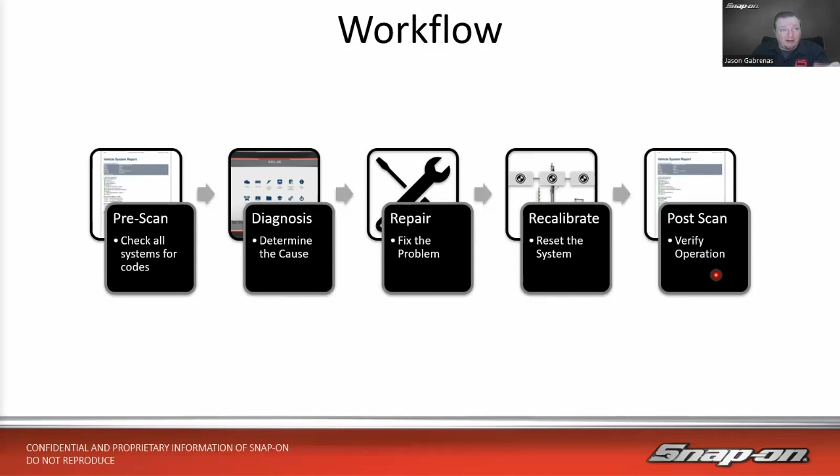So we'll scan all the modules again, and we'll make sure there aren't any codes left in the system, and that will allow us to give that car back to the customer with a clean bill of health and hopefully avoid any of those comebacks.

So for this section, as we said, this is part 1 of 2. This segment tonight is going to talk mainly about the diagnosis phase. If the codes are found, we're going to determine an action plan. It's good to have a repeatable diagnostic workflow. We're going to walk through and gather information. I like to say wrenches don't really fix cars anymore - it's information that fixes cars, because we need that information in order to go through a good diagnosis and repair the problem.

So we're going to gather TSBs. TSBs are the first thing you should check, even if you don't think you need to, because the manufacturer may have figured something out that you're about to find out on this car. So, oh yeah, we've seen like 100 of those, and here's the problem, here's what fixed it. So you may find yourself with a common problem, and a TSB can help you out with that.

Then, of course, OEM repair information. I need to have my diagnostic charts and my wiring diagrams and any other manufacturer specific information from the manufacturer to repair a car, more than likely.

How about some real world repair information? We want to put that in there as well. What have other techs done in this same situation? Maybe you'll be able to figure it out a little bit easier if you can see what another tech has done. And then data stream, right?

We want to check the data out of the vehicle. We want to check freeze frame data as well, and check the data stream coming out, see if there's any anomalous data. Functional tests - we can use functional tests to diagnose something I need to turn on and off, like an AC clutch or some sort of a solenoid. Maybe I need to cycle it on and off with a bidirectional control. Functional tests can help us in that diagnostic process and say, hey, this is either working or it's not.

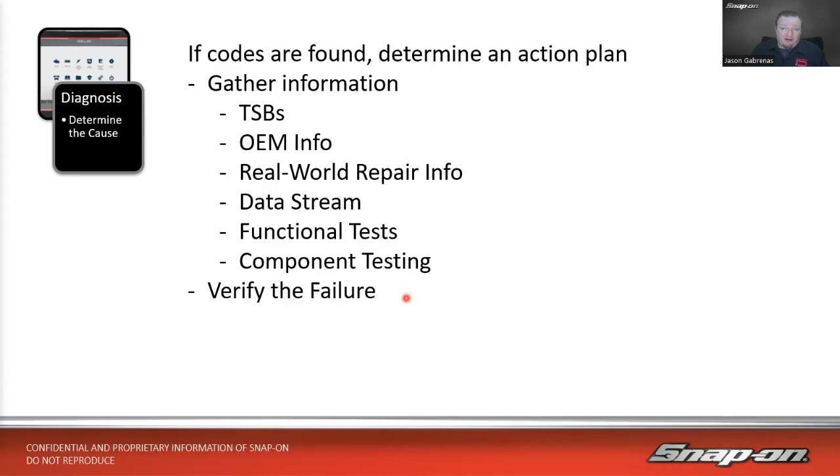So let's go live on the tool. This is going to be mainly tool driven today. But before I even get on the tool, I need to start with the customer, right? Customer comes in, I have my shop management system right here. I need to write a repair order. There's a few things we're going to do with this repair order throughout this scenario.

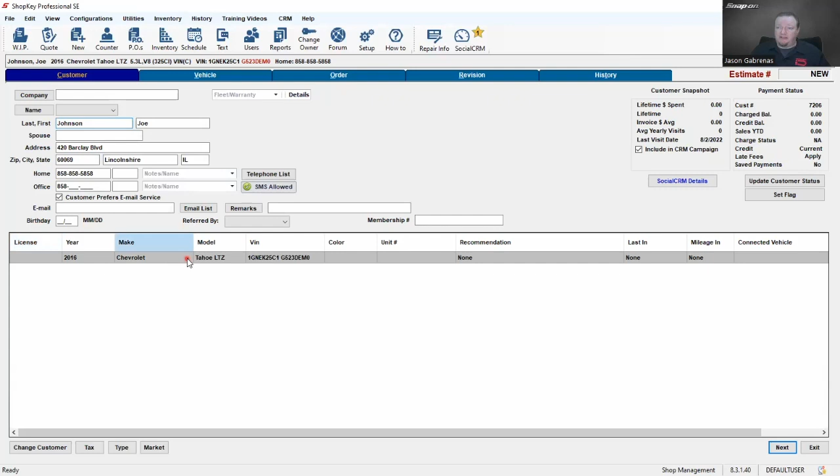So I've got to start a new order here, and I'm going to write it for Mr. Joe Johnson from Snap-on's founder there. And he has a 2016 Chevy Tahoe. So we're going to open that up, and then we're going to get to the repair order.

So vehicles come in and we ask Mr. Johnson, well, what's going on with your vehicle? Maybe he has a fluid leak or no start, hard start. How about a surge or a chuggle going out there? Maybe it's a drivability type problem. So maybe we'll add that one in there, drivability problem. Once we go through, we say, okay, it's going to be, however much it's going to be for a diagnostic fee. And then we'll just go through like that and start the order.

So we bring the vehicle in. And then, of course, what we need to do is we need to scan that vehicle. So we'll take our scan tool here and we'll go into scanner. Now, this is an important screen that comes up, and I want to make sure I mention this, spend a little bit of time on it, because we still do get phone calls throughout the day at tech support for this type of thing.

So this is important to note, because it is the opposite of everything we've been telling you for the last 30 years of scan tools. What we need to do, and it's been 4 or 5 years it's been this way, we need to make sure the key is on the vehicle before we connect the scan tool. Now, why do we need to do that? So we have this function that's called instant ID.

So what that does, and this applies to any of our scan tools, it just seems to affect the ones with the wireless dongles a little bit more, but it's true with any of our scan tools now, is when the tool sees power, that is the cue for the tool to go look and find a VIN in the module. When it finds the VIN, it pulls it back, decodes it, and that's how we can get the vehicle ID more accurate.

Problem is, if the key is off and I go to plug into the vehicle, well, the tool's still going to see power, right? It's going to see power coming down pin 16 as long as the fuse is good. So it'll see power, and then it'll try and find the module. Problem is, key's off, so the module's not on. So it's going to try and find it. Eventually it times out, tries again. During this time, maybe you've turned on the key now, so it throws it out of sequence. So it seems like it's taking a long time to ID a vehicle in some cases.

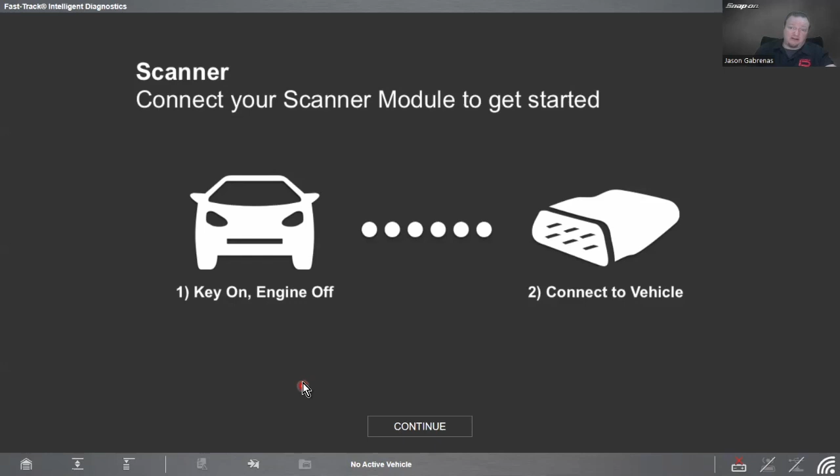It shows up on the Zeus and it shows up on the Verus. It doesn't show up on the other tools because it doesn't really affect them as much, but that is how it works. So we want to make sure the key is on first before we plug in. Once we've done that, we can ID the vehicle, or maybe instant ID is already started, but in this case, we're going to load our demonstration vehicle, and it is our Tahoe right here.

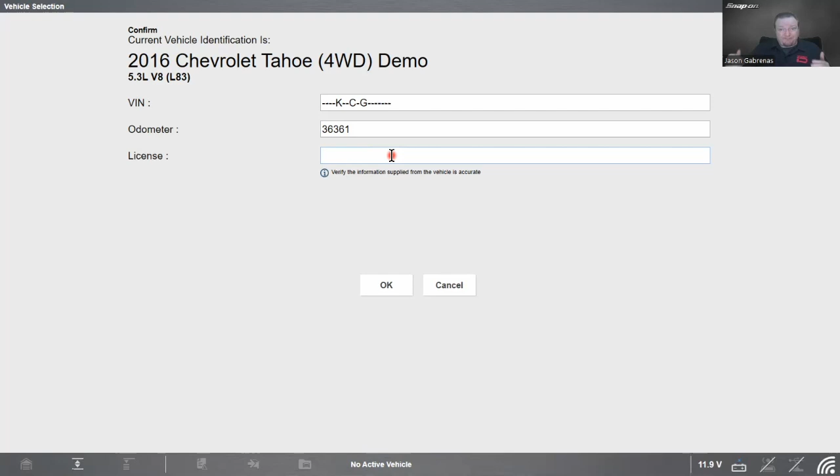And then we also add in the odometer on vehicles that support it. So it'll pull the odometer out of one of the modules and just pull that up on the screen, as long as the computer supports it. And then it also has another place to plug in the customer's license plate number to make it easier to find later on down the road. If I have 1,000 vehicle records in there, it saves time. So we'll hit OK.

Load into the vehicle. It's currently running in demo mode, so let's continue there. All right, and then we have our code scan, clear all codes, and then service resets and relearns quick link here. So this gives us a quick link to any resets, relearns, recalibration that's needed on the vehicle. So that gives us a nice link there. We're not going to talk about that today though.

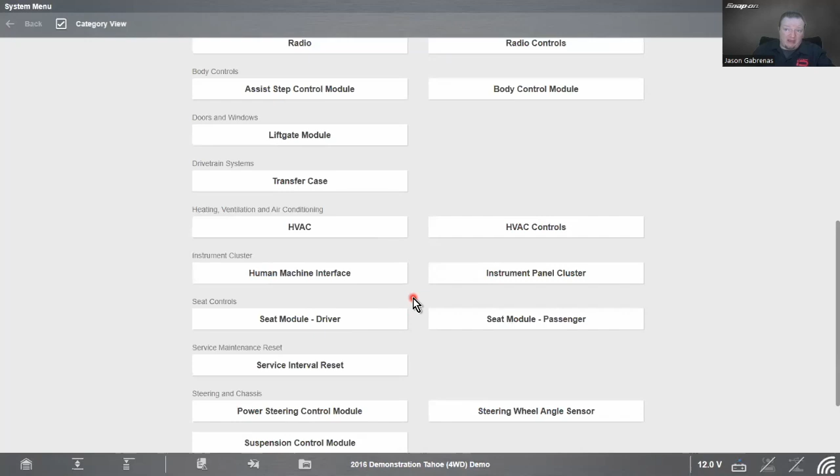And then down below is going to be all of our modules. So if I don't have a tool like this, I can still go into my modules separately. What we do though is we categorize those modules: steering and chassis here, seat controls, instrument cluster, etc. So it gives us all of these categorized systems. If I have 20, 30 systems on a vehicle, it makes it a little bit easier to see.

And then we have our code scan. So we talked about the importance of doing a code scan on a vehicle so we can scan the entire vehicle, all modules, and check them for codes. So we'll do a pre-scan since we're just starting. So we'll have our pre-scan here.

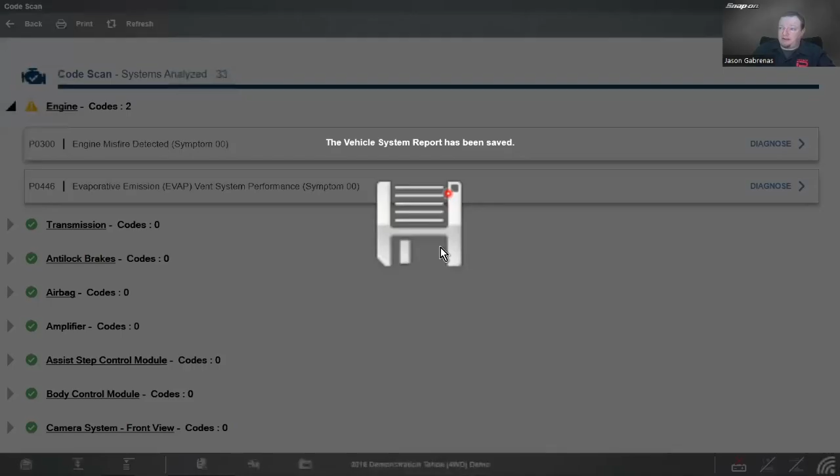It's going to go through, scan all the different modules, and then it comes up with some codes. You'll also see that it's saved there. That little flash of gray on the screen indicates that it's been saved. So it's been saved to the tool, and it also will upload to the free Snap-on Cloud service that you would have access to as well, as long as you're using a Snap-on tool.

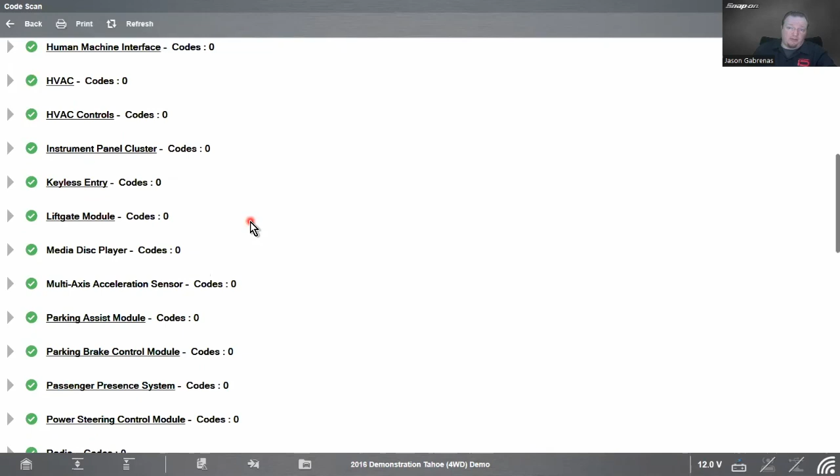And then we can scroll down and see the status of all the other modules on the vehicle. In this case, they're all green, which means there's no codes and it's in good shape. OBD2 codes, it also checks, and it also checks mode 10 permanent codes, and it also checks the readiness monitors down below for all the monitors, right?

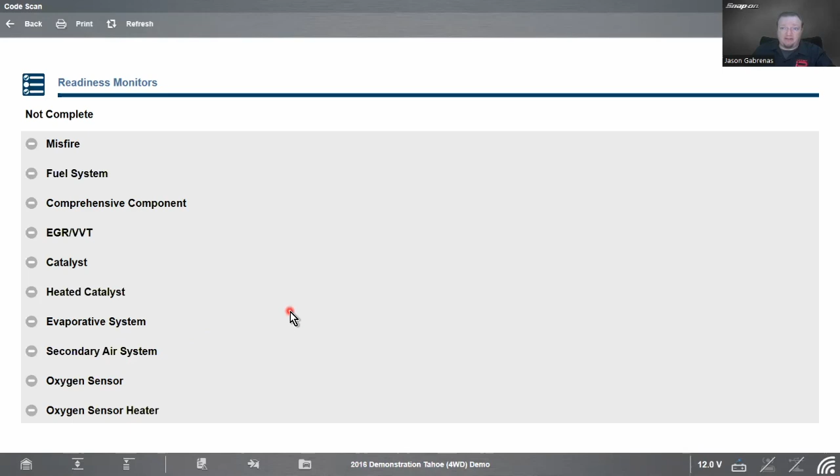So this will help you when you do a post scan as well, and you can see, well, have all the monitors set? I can confirm that the monitors have set, or hey, you can see, was a code cleared recently, maybe by another shop? You can see not all the monitors may be run, and it may also have a code in the permanent codes as well.

So once all that's done, we have our codes on the screen. Now we want to report. We have a report that we can share with our customers. So you saw how it's saved. So you can come down here, open this up. We can see the codes are here on the left. And then I also have a vehicle system report over here. So if I double click on that, it's going to open the report for me in a PDF format.

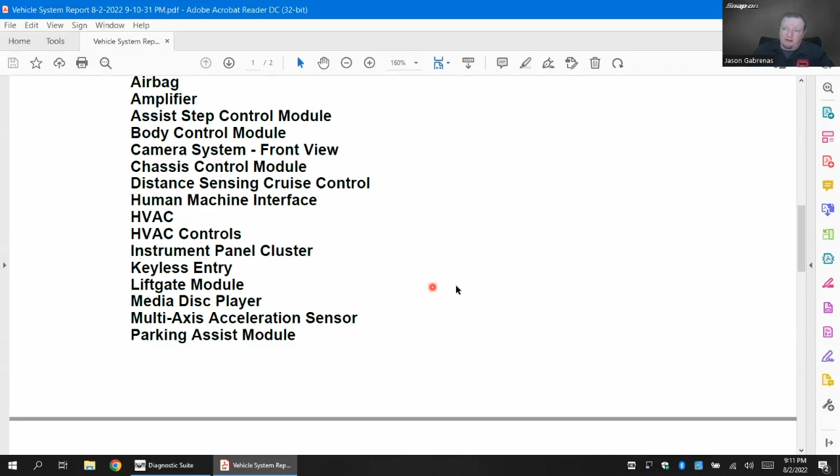And you can see right there, shop name and all that, vehicle information. That's going to show us the systems with codes, systems without codes, and then it gives us a little more detail down the bottom here. It shows us our monitors as well. So you can see all the detail there.

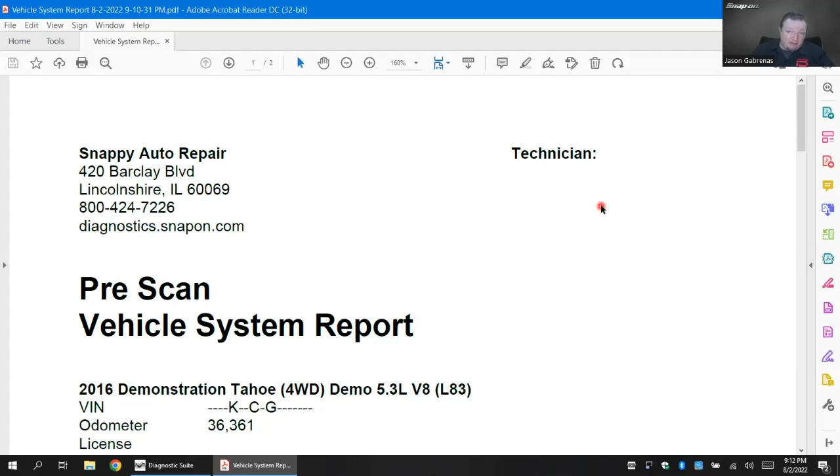So we could print this out. We could hand it to a customer if we wish to do so, or we can attach it to an email if we wanted to do it that way, or we can share it using the free Snap-on Cloud service as well. So let me show you that.

On a Windows-based tool, like a Zeus or a Verus, we have a link to the Snap-on Cloud. Otherwise, you can go right to the web. Anything with a web browser, it'll work. Just go to the website altusdrive.com and you can set up a free account there. But if we go in here, we can see how it looks. And it's back to where I was.

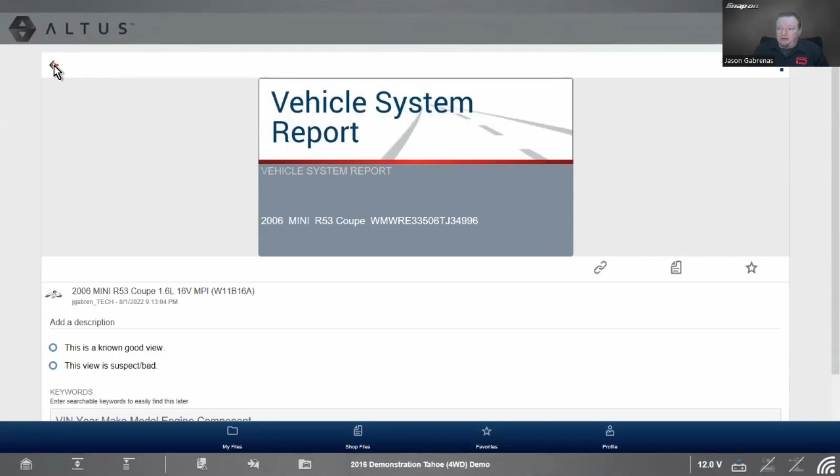So you would log in, and then we'll be able to see, here's my system report from earlier this evening. We can see that vehicle system report right there. We can click on it, open. I can click on it, open again, and it's going to open in a new window. And it gives us a report. It looks exactly like it did on the tool already, right? This is one from earlier. We can see that right there.

If we go down to the bottom of this report, we can see it also tags it with what kind of report it was, pre or post scan, code numbers, VIN, year, make, model, etc. We can see all that information down here on the bottom. And that makes it a searchable tag, so we can go through and pull back just that information.

If I have thousands of different documents, because it does pre-scans, post-scans, ADAS reports, it does screenshots, it does photos off the camera. So all those things get uploaded to this website. So you would want to be able to search through and see the documents related to just that one vehicle. If you did the license plate, it would tag it in there as well.

Now, if I wanted to share this with a customer, I can go up here to this link, and then it's going to give me 3 ways that I can share this. So first one, send via SMS. So that is if I was on a phone and I wanted to text it to somebody. If I had this open on a phone, that wouldn't be grayed out.

It would give me the option. So I can click on that and I could text it to somebody using my phone. SMS is short message service, or a text. Next one, send via email. So if I have an email client installed on the machine I'm using, like Outlook or something like that, I can click on that and it'll open up a new email. It'll put the link in the body of the email, and then I can just tell it who I want it to send it to, and it will send.

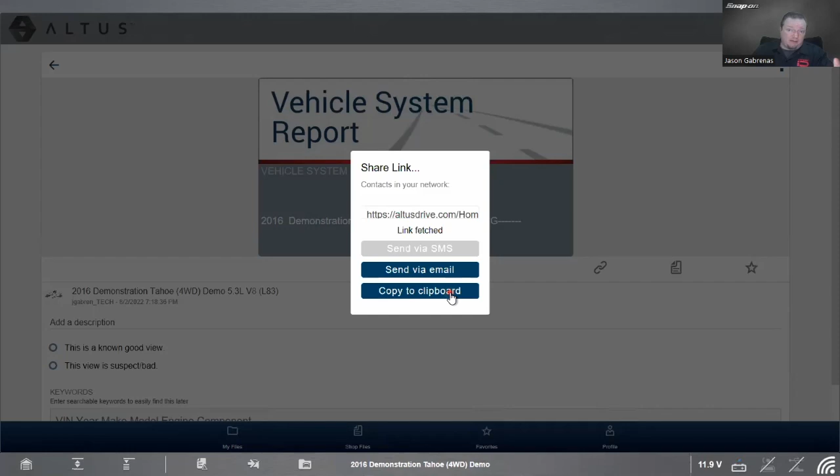And then we also have copy to clipboard. So that'll copy the link to the clipboard and allow me to paste it anywhere. So that's what we're going to do right now. In this case, I want to paste it in my shop management system. So here's my repair order for this car again, and I want to add a note. So I'll go up under notes, and then I will just paste in that link. And now my link will be linked to the repair order, so then I won't have to worry about finding it later.

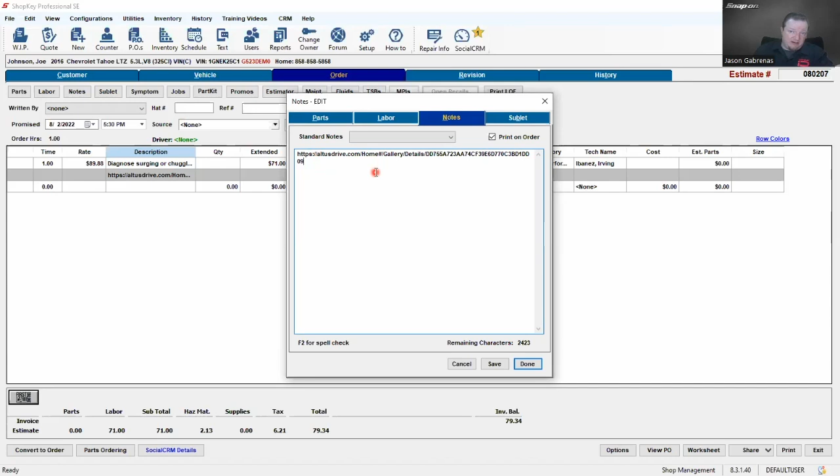And then we see it also comes up as a line item right there. So I could reopen that, highlight it, paste it in my browser, and it would work a month, a year from now. If I go back in my repair order history in this customer, I can see, oh, well, there was the pre-scan, post-scan right there as well. So that's kind of handy how we can do that.

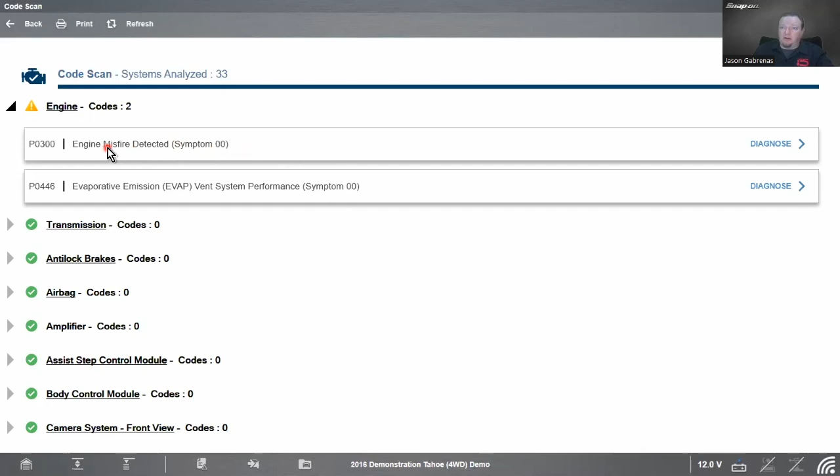All right, so there's my vehicle system report. There's my upload. So we intake the customer, we scanned the vehicle, we showed them the pre-scan, and now they authorized maybe an hour of labor time or whatever it happens to be. So we can go in here under the P0300 and let's diagnose this code. So we'll hit diagnose. Now this tool is a Zeus, so it has Fast Track Intelligent Diagnostics. So if you have a Zeus, a Triton, or an Apollo, as long as they have a current subscription or data plan active, they will have access to this.

It's a diagnostic workflow is really what it is. It's called Fast Track Intelligent Diagnostics. It is a repeatable diagnostic workflow, and it filters all the information on the tool based on the vehicle and the code that we're working on. So we don't have to worry about any of the other noise, hundreds of PIDs or hundreds of TSBs to filter through, and it just brings it right to the one page where we need it. So we want to read it like a book, top to bottom, left to right.

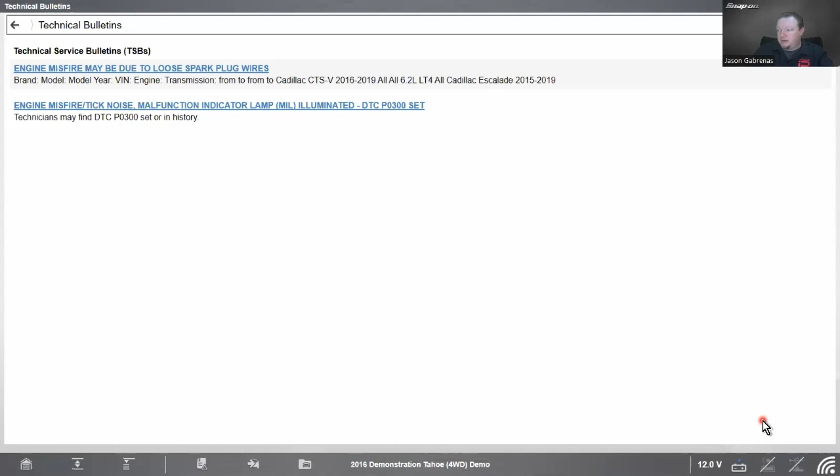So the first and most important thing we want to check is TSBs, because once again, a manufacturer could have figured out this problem already and already has a fix for it. So we'll go into TSBs and see what we can find. It looks like there's 2 of them. So instead of the 400, 500 TSBs that might be on this vehicle, it's going to bring back just the 2 that apply to this particular concern. So first one, engine misfire may be due to loose spark plug wire.

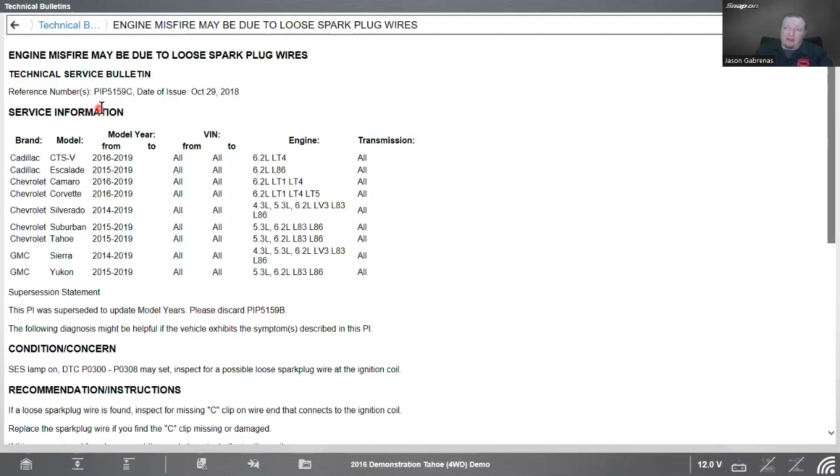You can see we got the OEM information right there. We get the information from the OEM as soon as it's published, and then we are able to publish it to our products within 2 to 8 weeks, depending on where we are on their update cycle. So you will have access to TSBs faster through us than anywhere else other than the manufacturer.

So it looks like in this case, this is dealing with spark plug wires, and they could have a missing C-clip on the end that connects to the ignition coil. I thought that was interesting because if you're going to check it for a misfire, maybe you pop the wires off, you look on the spark plug end, but you might not think to look at that coil end, right? So we have a loose connection there. It's not holding enough tension on the coil, so it gets a little bit loose, it's difficult to make a connection, and it will cause issues. So let's say in this particular example we're looking at Mr. Johnson's car, and sure enough, we look and say, hey, I'd never seen that before.

Let's go inspect the spark plug. So we inspect the spark plug wire, and sure enough, there it is. Got a problem there. So let's say we replace the spark plug wires, and that solved that problem. But we still have this P0446 code as well. So let's go back and switch to the 446.

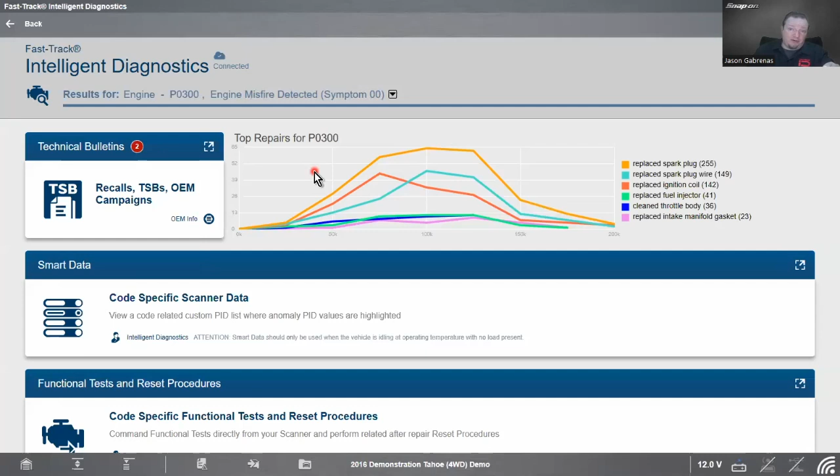Now, another nice thing we have is this drop-down menu. So I don't have to go back and forth and switch and try to find the code. I can just switch over to the same code, or a different code from the same page. P0446, there we go, top to bottom, left to right. TSBs look good. We don't have any TSBs there.

So next thing we want to do is go over to my top repairs graph. So this is our experience-based information. It's based on over 2 billion real world repair orders. So we're actually able to go through there and find out on a 2016 Tahoe with a 5.3 with a P0446, what was done on the repair order.

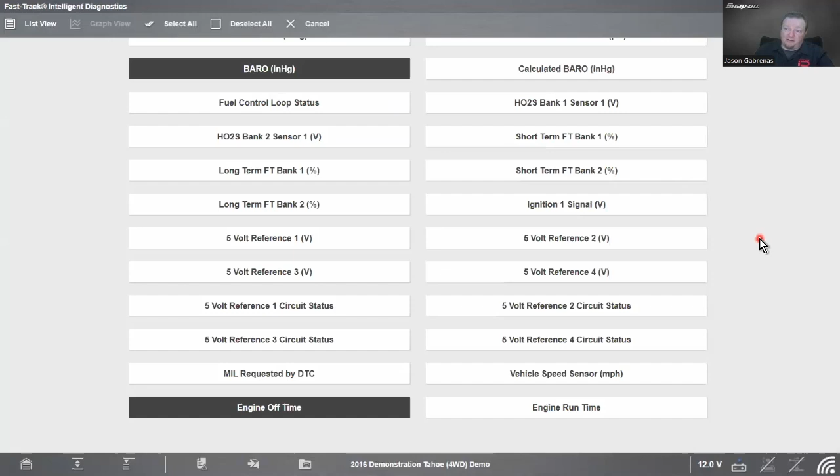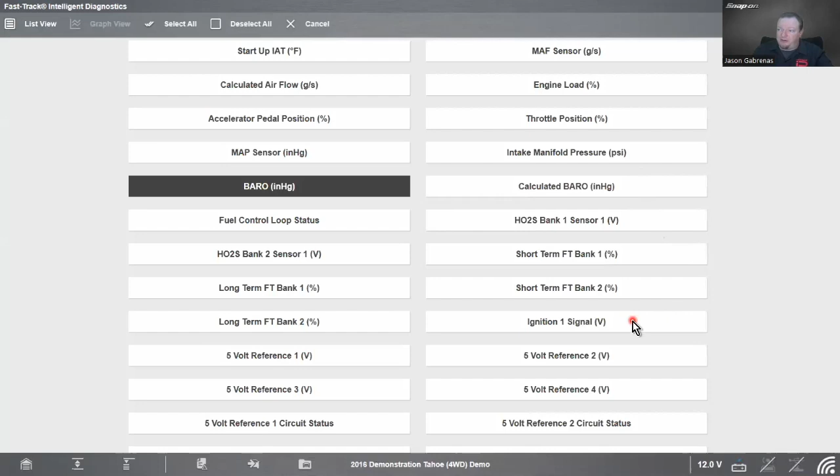So if I go to my custom list, we can see what's there. The black ones are the ones that are picked, and the gray ones are the ones that are not picked. And it looks like there's way more not picked than picked. And that's fine, because I really don't need to know what the mass airflow is doing if I'm trying to check an evap vent, right? Might not need to know my barometric pressure or my ignition signal. We don't need to know all these things if we're diagnosing an evap problem. So it filters out all this noise and gives us just what we're looking for.

So I go back to that list again. We're going to see that we have a flag. Now, depending on the data, the vehicle, and the problem, you could have multiple flags on multiple PIDs. A blue outline white flag indicates that PID is being monitored and it hasn't exceeded our known good min-max values. In this case, we have a red flag, which indicates that PID has gone outside of the min-max values based on real world cars.

Now, you could also set your own minimum and maximum values in here. We're not going to go through that, but you could go in here and set that parameter to whatever you want it to be. And you can also record that as well. Now, it's automatically recording for us. It also automatically saved it when it triggered.

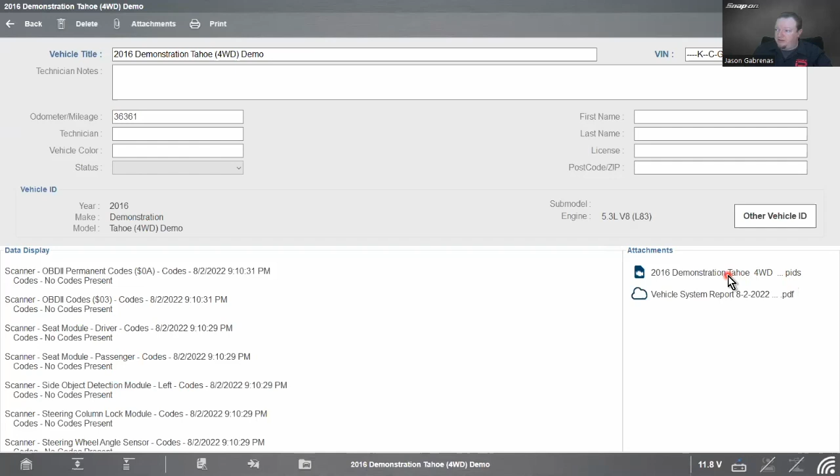So if I go down here on the bottom and I wanted to replay that, you see we have PIDs, right. So I can open up those PIDs. It's going to open up on my screen in my ShopStream Connect file viewer. And then we can see there's my red line there. And then all the other ones have a gray line going across at the same time. So we can see what's going on with those particular PIDs.

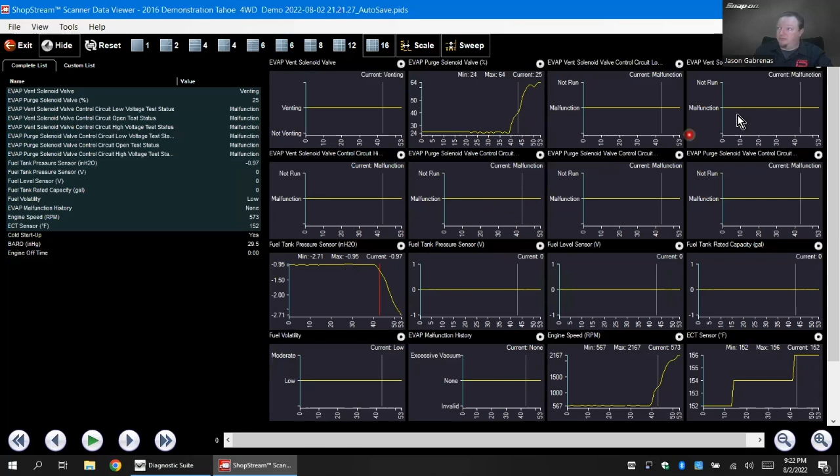Any Snap-on scan tool will be able to save the recording and play it back in the scanner data viewer that's in ShopStream Connect as well. So just so you're aware, if you have a non-Windows based tool, you can still go through and access that on your Windows based device because it does only install on Windows.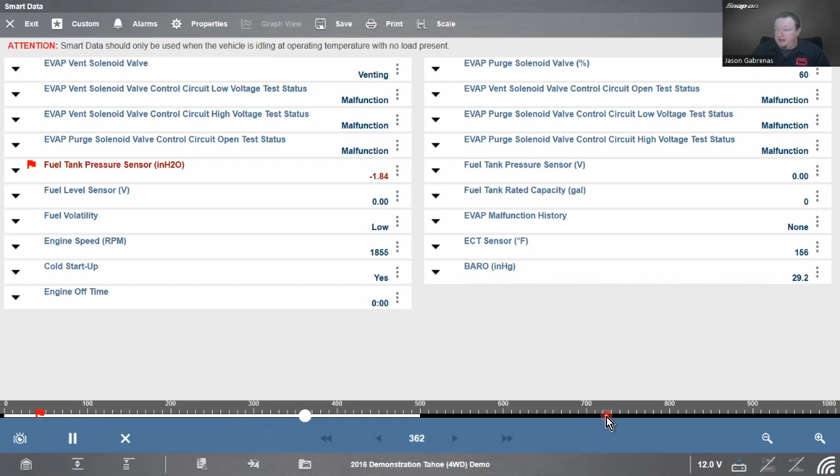So there's my data. Another thing that we've added to the data is this flag tracker down here. We call it a ClearView flag tracker. So what that does is on this timeline, it's by ticks, number of samples, right? So on this timeline, that flag set way over here towards the beginning. I could have another flag here, could have another flag there, depending on where it is when I'm playing it back. So the nice thing is I see this flag, I can see where it is in time.

And if I click on that flag, it's going to open up the PIDs that triggered at that point, and it's going to bring me to that point in time on the recording. So I can see right there, there's my red line. There's where it triggered. Came down and it triggered.

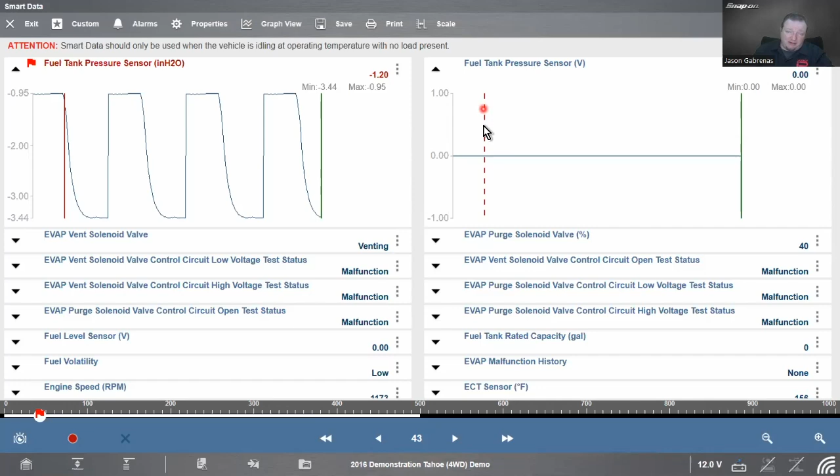If I want to open up something else, I can see where it triggered at the same time on those PIDs. It just would be a dotted line because that PID did not trigger at that time. So I can see that's related to this one over here. And all of them will have that dotted line on there unless they actually set a trigger. So that's a nice visual way of going through your data. And you can just click through down here and just see where everything lies. So I can see the different parts of the window there and see where it goes.

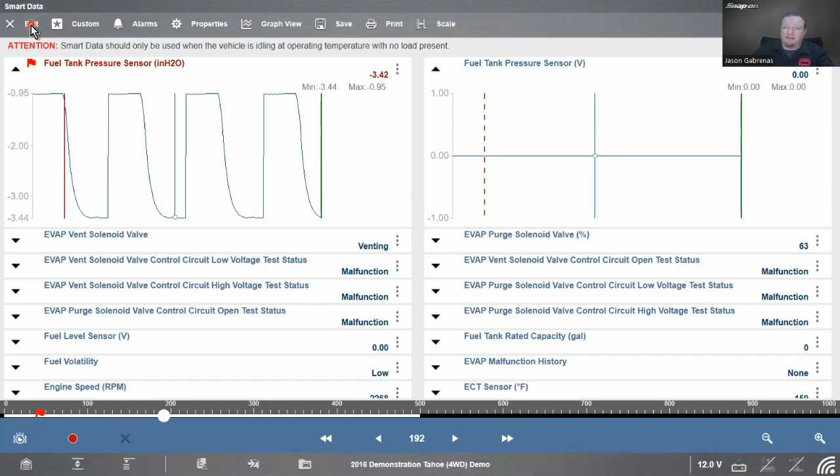All right, so that's my data. And maybe we find an anomaly in the data. Maybe we don't find an anomaly in the data. Next thing we want to do is check what's going on with the vent solenoid. So I want to find out a little bit more information about this vent solenoid because maybe I'm not very familiar with it. So I want to go all the way down to the bottom here. I know, kind of skipping ahead, but I want to go into my repair information.

So this is a link to optional ShopKey Pro or Mitchell ProDemand. And what it's doing for me is it's logging me in, it's logging the vehicle in, and it's doing a search for the code that I was on. So there it is. There's my search results right there.

So that saves a ton of time versus having to walk across the shop, open the computer, open the web browser, log into the website, log the vehicle in. Oh, what code was that I had? I don't quite remember. Maybe I wrote it down. Saves all that time. You can do this from the seat of the car. I'm still working in the scan tool. I can do it all from the seat of a car.

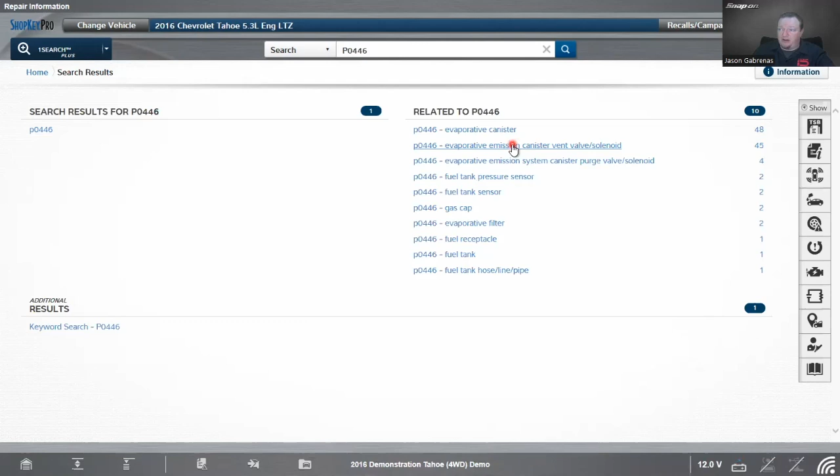So I have my OE results over here, and then I have my filtered results or additional results related over here. So what it's going to do is it's going to take the code and it's going to add that list of common repairs there. So in this case, evap canister vent valve, vent solenoid. Go in here, gives us our fixes, causes and fixes, guided component test, which we're going to talk about in a little bit. Component connector.

How about component locator? Where is this part located? So I need to be able to test it. I need to know where it is. So that's number 10, it says on this diagram. Pull up the diagram.

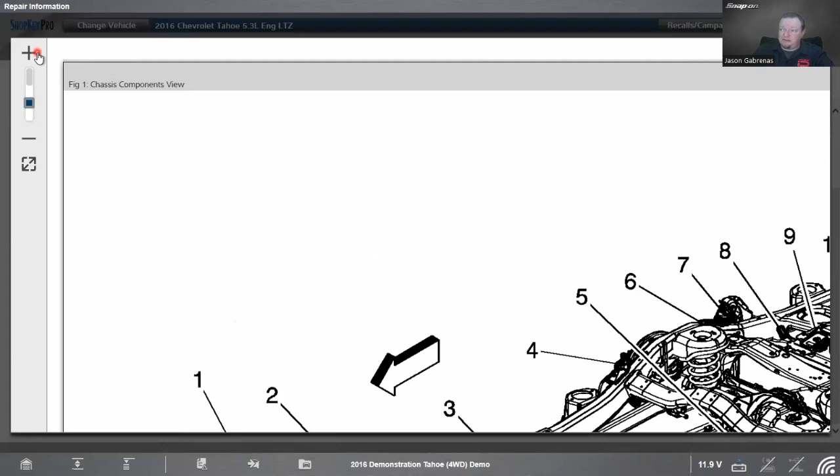Number 10 is back here. Let me move that over a little bit. There we go, number 10 is back here. Looks like way in the back, behind the axle, close to the fuel tank, which is to be expected. Most vent valves are going to be in the back near the fuel tank or near the evap canister anyway. So we can see that back there, and that would be where I need to test it. So I've got to put it up in the air and be able to access it from the ground, then I'll be able to test it from there. The connector's back there.

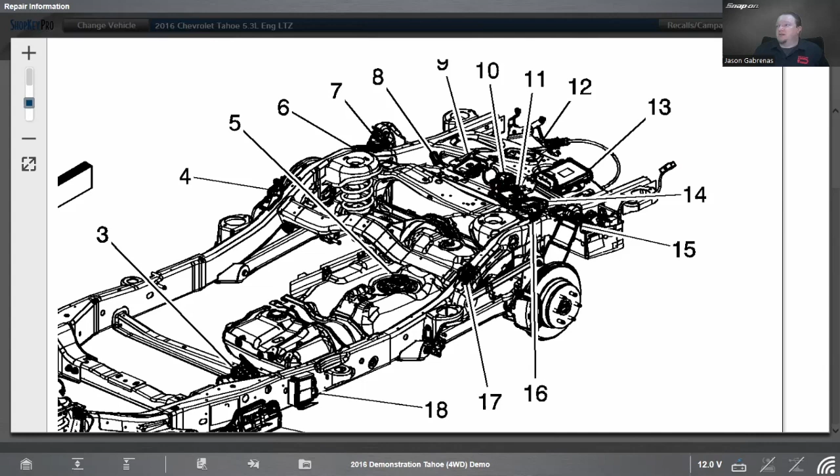Speaking of the connector, let's pull up the wiring diagram. I want to be able to see the wires so I can actually test this circuit. So there's my wiring diagram there, I'm going to open it up. And one thing you'll notice when I do open it up is I have some wires that are already highlighted down because those wires are attached to the solenoid. That eyeball right here will dim the other wires, makes it a little easier to see. And now I can zoom in on them.

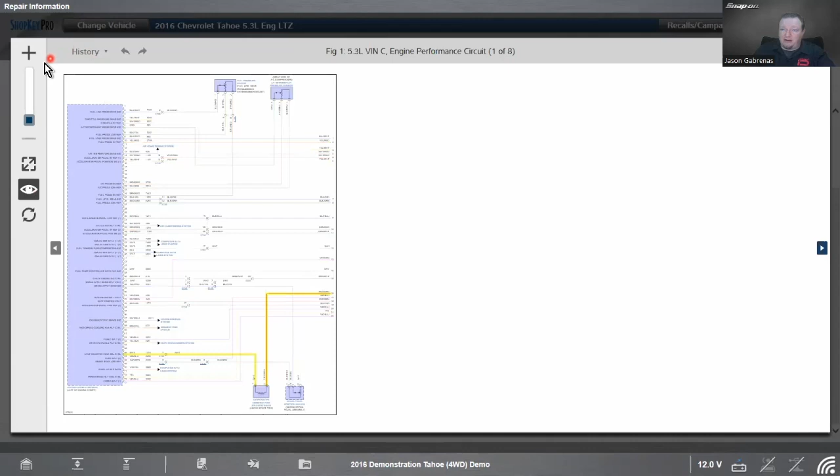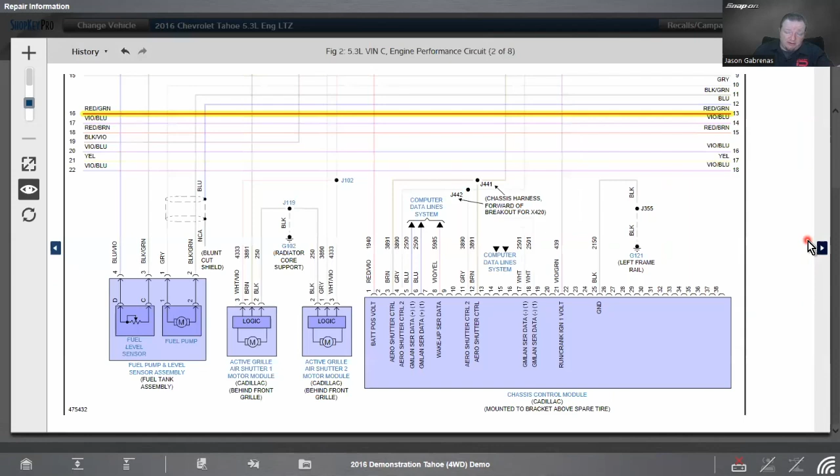Scroll up a little bit. Okay, so we see we've got the solenoid controls on this violet wire right here, and then the red and green wire goes up over here and off the page. So let's see where that one goes. Another nice thing about the highlights is it carries through on the next page, and it also carries the zoom level through. Brings me to my third page and I can scroll up and see where that goes.

So instead of having to print them out, tape them together, and use a manual highlighter to highlight them all, no, we don't need to do that. The tool does it for us.

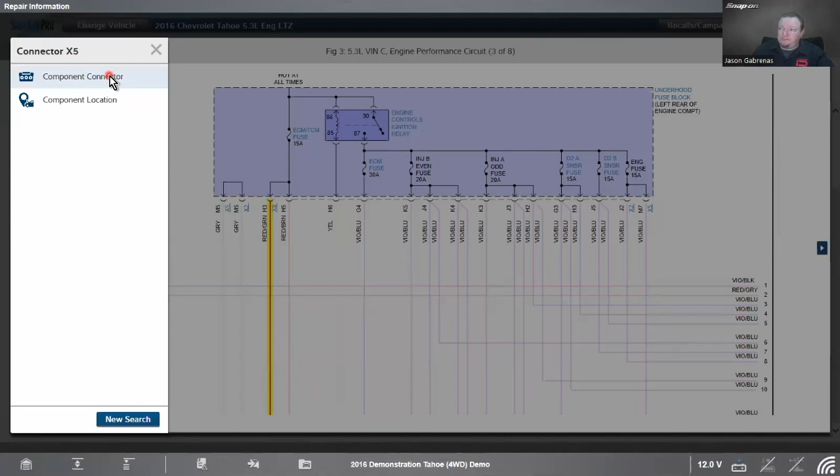And then we'll find the connector. Now there's a lot of connector X5s, so we got to find it on the list. All right, go in, let's see, what was it? Underhood fuse box. And it was H3, so that's H1, that's H6, so 1, 2, 3 right there, that's that pin right there. Should be able to see that as well.

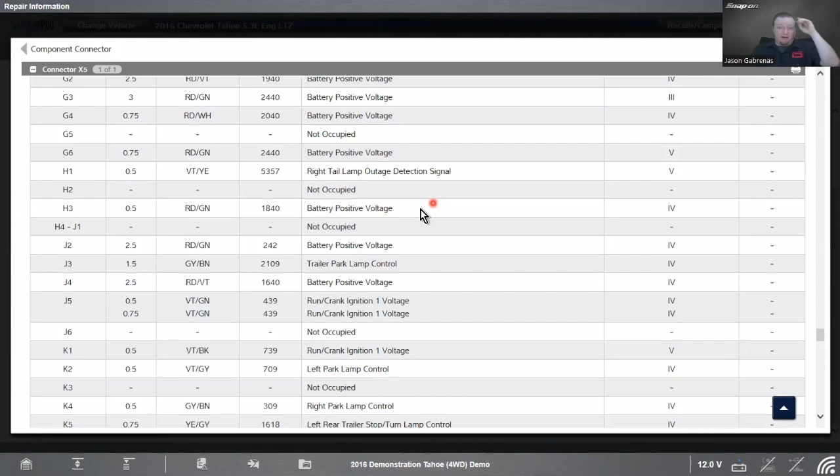H3, left. No, that's... I skipped over it. There we go. Battery positive voltage, that's our battery positive output. So that's what we should see right there because it is a constant battery power and the ground side is controlled by the computer. So that's right there, pin H3. Now I know where I need to pin it, if I need to pin out that side with the fuse.

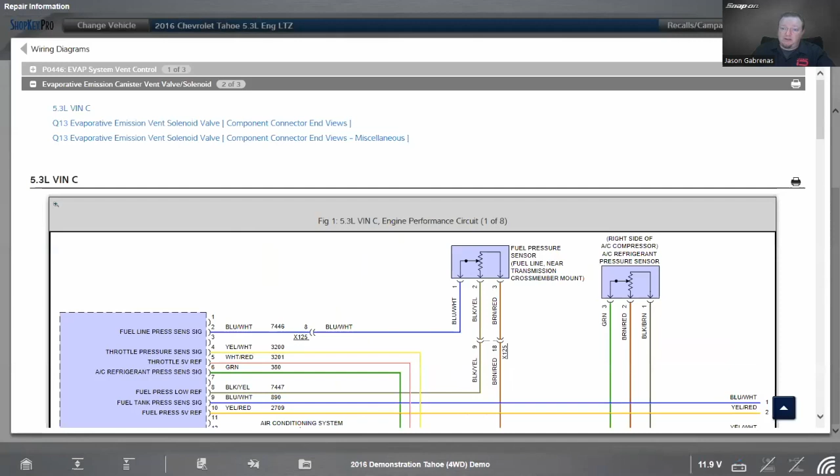Otherwise, to pin it out, I can look at my data component. So let's go back to, now that I have that information, I know where it is, I know what wire colors, I'm going to go back to the scanner and back to my intelligent diagnostic.

So we did data, well, we did TSBs, we did the graph, we did the data, so we're kind of going in a nice order here. Functional tests, you can go down to functional tests, evap vent solenoid valve. Notice that it was a filtered list of tests at the top as well, so I don't have to hunt through all of the output controls on this vehicle.

Come in here, it's going to collect data, and then there's my functional test. So I could set it to venting or not venting, open and close. It defaults to open, and then I could close it. So I could be doing this under the car with it in the air and seeing if it clicks just by doing it that way. I can also see how the data would react, and you see there's a lot more data on here than there was before because it doesn't filter down the list based on that for the test. So, venting or not venting? Fair enough.

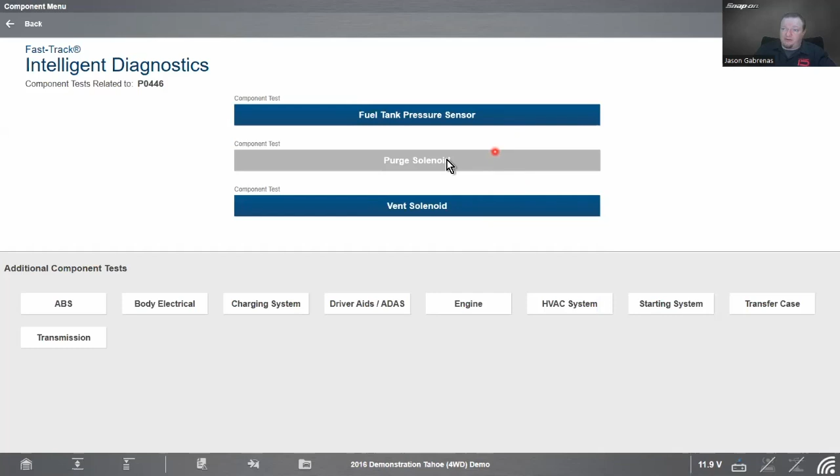Let's go down to the next one, which is guided component test, where I'm going to test the component itself. So it's filtered out based on the code, based on the vehicle. We have vent solenoid right there.

And then I can get a little bit of component information. It's going to tell me how it works. And then if I back up, I can do a DC voltage test.

So yellow goes to vent control, black goes to known good ground. So I have color coded leads. Channel 1 is yellow, and then that'll be white. And then red and green is going to be on the voltage positive. We saw that on the wiring diagram.

During the monitor, PCM energizes the solenoid, allowing vacuum pressure to build in the fuel tank. Should see 1/10 of a volt or less on the control side when it's energized. And we're going to move over to the power side, and it should be normally open, should see 12 volts on both A and B with the meter lead connected to ground when de-energized. So when it's off, it should be 12 volts. When it's on, we should see 1/10 of a volt on the control side.

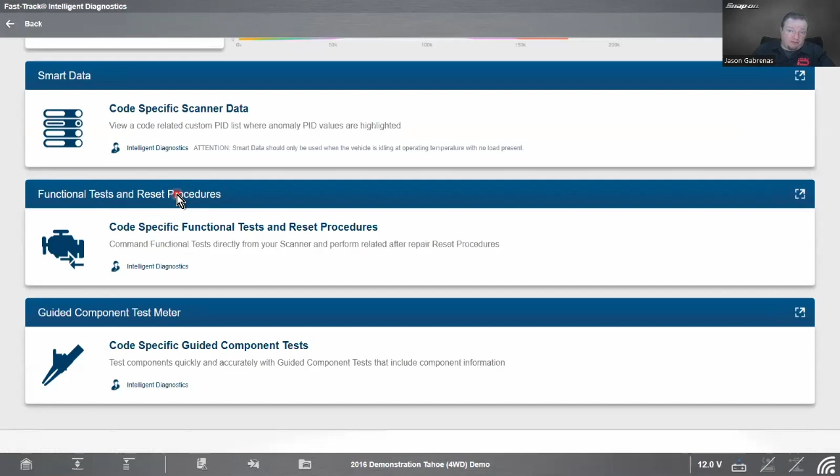So that's all well and good, but I want to be able to cycle it on and off while also testing it with the scope. So we can do that too. Let's back up here a little bit. I'm going to go back into my functional test. I want to be able to turn it on and off while being underneath the vehicle to test the valve.

So we're going to go to the evap vent solenoid. Continue. And then it's going to pull us into this, right? Now, I'm going to go home and I'm going to go into my guided component test module by itself. It's going to carry the vehicle through. Go into engine, and then you see we have all of our different components that we can test here.

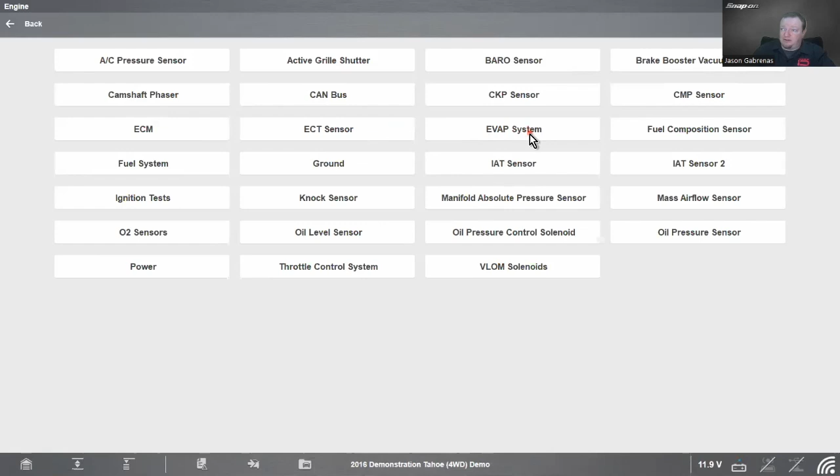We're going to go on the evap system and the vent solenoid that we saw earlier. There's our component information and the DC voltage test just like before. Go to the DC voltage test. I'll hit view meter. It's going to click and buzz.

It's going to automatically set the voltage where it needs to be. It's automatically going to set the time where it needs to be. And then I see right here, I got 0. Now I want to be able to see this on the screen at the same time as the functional test, right?

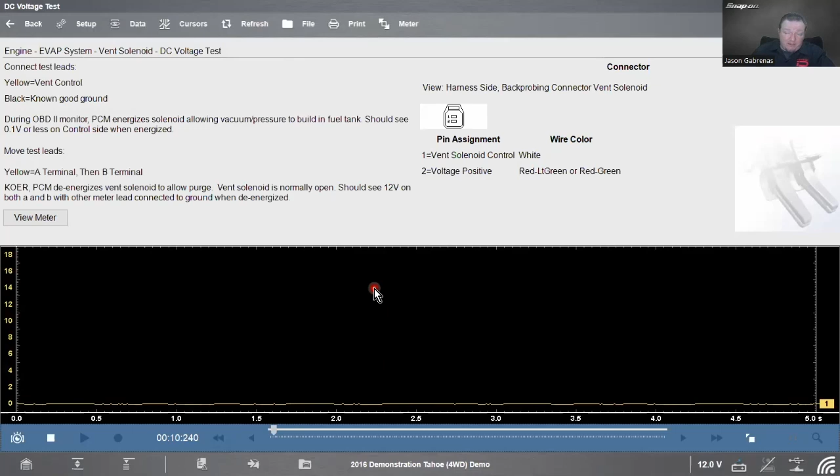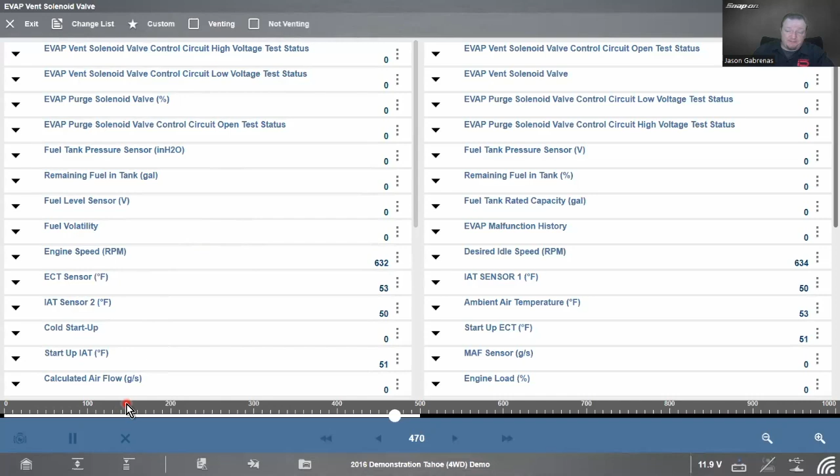So I'll hit meter, makes it a window. Now that it's in a window, I can go home, I can go back to my scanner, and I'm back at my test. Go down the bottom, pull this up, go to my scope viewer, take that, snap it to the right, take that, snap it to the left, and now I can cycle it venting to not venting, and see if it changes.

Now, if I'm supposed to have voltage on the control side and I don't, then I know the voltage probably isn't making it through, right? It's not switching. It's trying to switch, but it's not.

What if I hook up to it though, and I see this? So there's my voltage, right? And then if I set it to venting, it should have voltage. If I set it to not venting, it shouldn't have voltage, right? So I should see something like this. There we go.

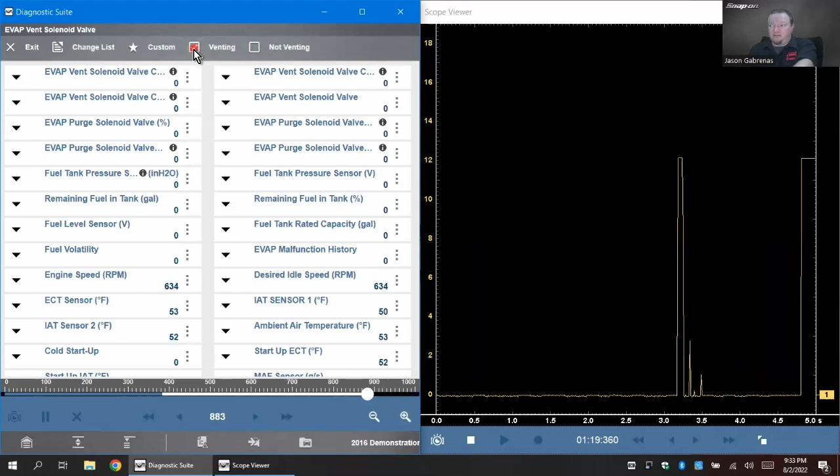There we go. Oh, my switch is a little sticky on my thing. Should be able to see it go up and down based on that, right?

So let's say that we went in and it didn't have voltage coming out the control side like it's supposed to, but it did have power coming from the fuse, so that we know we had the power coming in. We need to verify that the computer is sending the signal and be able to see that. But judging by this, the solenoid is not switching. It's not turning on. So there's a problem with the solenoid.

So we tested the solenoid directly. The solenoid is not working. So in that case, we can be pretty confident that that solenoid needs to be replaced. So we went through the code, we went through our studying, our TSBs and all that. And then we come to find out that, hey, this solenoid is bad.

And that's where we're going to leave it for this week. Next week, we'll continue on with testing, more testing, and after the repair, ordering the parts, all that good stuff. So hopefully you can join me for that.

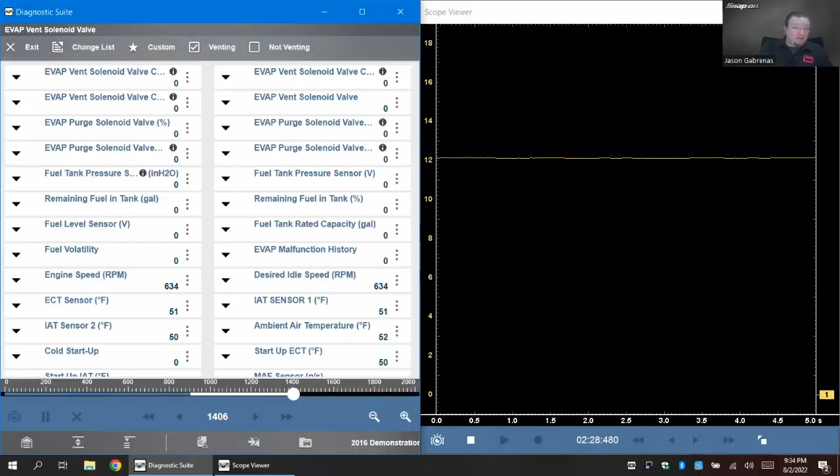So it'll be part 2 of this 2-part series on code-based diagnostics. We'll talk about that repair section where we actually go through and repair it and get the part for it, calculate our time. We're going to recalibrate if necessary, or do some sort of a system test we might need to do. And then we'll write it up, do a post scan, and send it on its way. So that's what we're going to talk about next week.